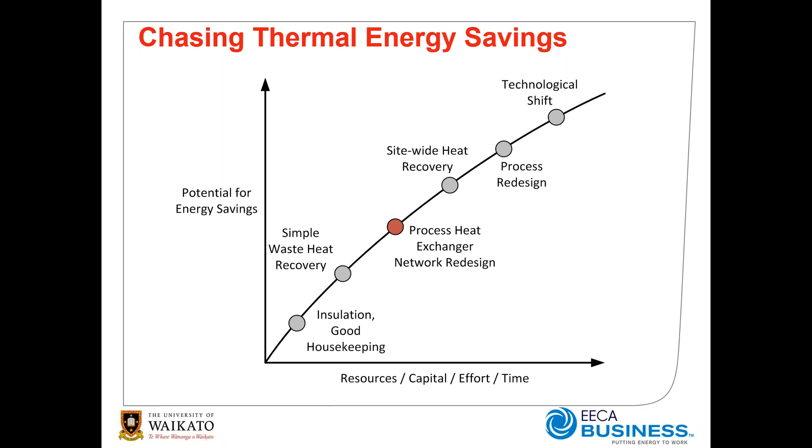As you go up the potential curve there, you get into more retrofit projects, and then you start looking at the site, and right at the top you've got technological shift. So that's really talking about a new process or a different process in order to make the same product, which has potential for a large amount of savings. However, the time and capital becomes quite a lot more. And we'll see when we talk about benchmarks, and in particular a gap analysis, how that becomes appropriate to look at as a measure of how much potential you could get.

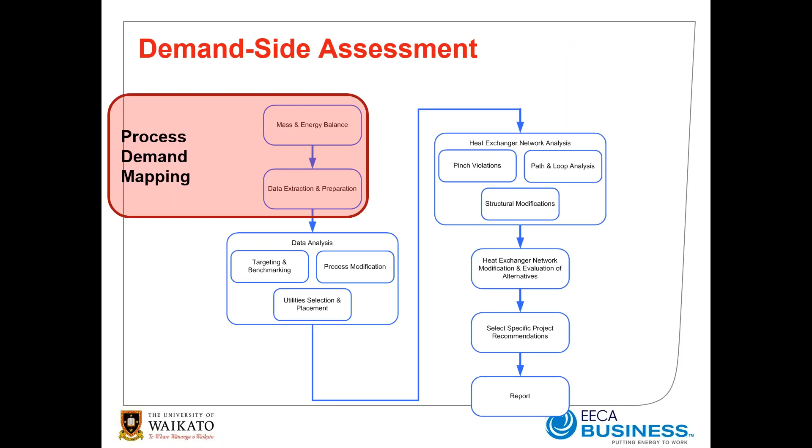Okay, so this is briefly a review from a webinar I did earlier in the year. We were looking at demand side assessments, in particular if you were doing, say, a pinch analysis or looking at your heat exchanger network. And the first thing to do is really look at what is your demand, looking at your process, mass and energy balances, things like that. The second step, or the second group of steps, is around benchmarking and targeting.

And that's a really important step before you do any design, because it outlines some boundaries of what's actually achievable. And so really benchmarking and then targeting is an early stage if you're doing a big energy reduction project, because it helps define what's actually achievable. So it's actually a really important step. Sometimes we rush off and want to do design, but there's an important step before that in defining that.

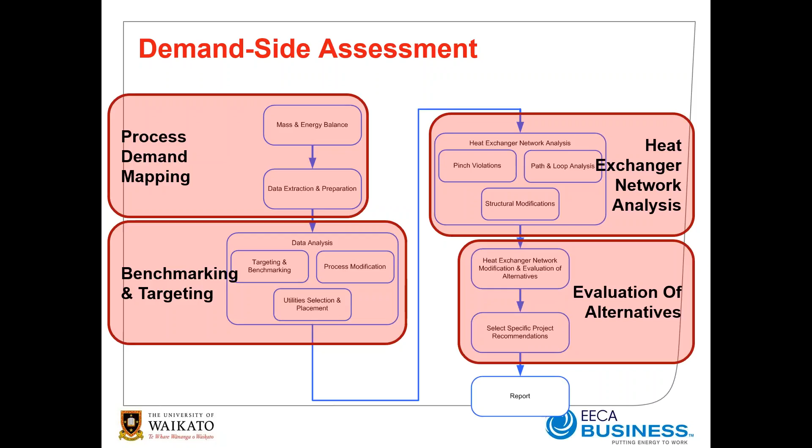Then after you've done your targeting, you go away and do some further analysis and design, evaluate alternatives. But if you don't get your benchmarking and your targeting stage right, or you don't do that well, then you may miss some opportunities for improvement, and they can really aid in identifying opportunities. So hopefully as we go through, we'll see how this benchmarking can be useful. So we'll briefly talk about targets and what the difference is between a target and a benchmark.

So a target is really something you aim for, okay, or you shoot at. So if you're an archer, you have a target that you're aiming to hit, and so it's sort of a goal, I guess is another term that you could use.

Whereas a benchmark is actually a standard that you use to compare something to. Okay, so in surveying, you have a benchmark, a fixed location that you know the elevation, and then from that you can survey out from there, because you know that location is fixed and you know the details around that. I think originally benchmarks were used by cobblers when they made shoes, and you'd put your foot on the bench and they would make a little mark and know what size you were.

And so it's slightly different than a target. What you're doing is comparing yourself with some other measure, and that could be for a number of things. It could be your feet, your energy use, or your costs, or whatever it may be. So it's important to realize the difference. A target is something that we've decided to aim for, whereas a benchmark we're simply comparing with someone else. And we may then decide that we want to reach that standard, or a portion of that standard, or go beyond that standard, but they are slightly different, a target and a benchmark.

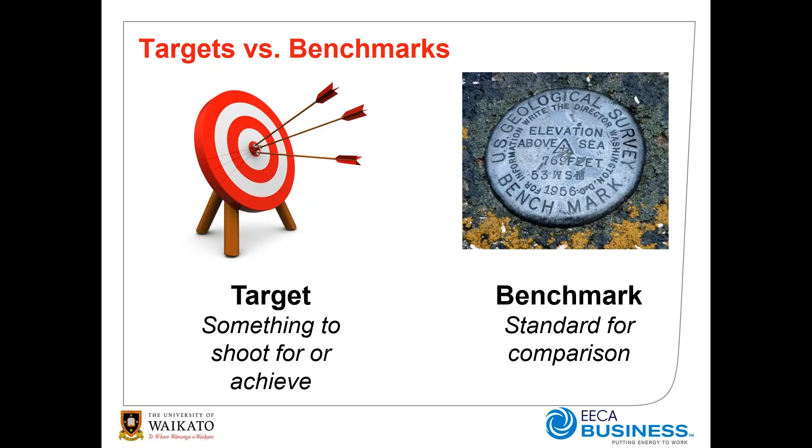So some examples of energy targets that you see often is somebody will come up with, we want to reduce our thermal energy use by 10%, or it may be in cost terms, we want to reduce energy costs by 10%, and that number will come from somewhere.

Yesterday, the draft NZEECS, the New Zealand Energy Efficiency and Conservation Strategy, was released for consultation, and one of the targets or goals it talks about in there is a 1% per year reduction in energy intensity. Okay, so that's a target or a goal that is being mooted as a goal for industry to meet. That's sort of what we've been tracking historically for the last 15 to 20 years anyway, but that's a type of target, something that you're trying to achieve.

Now, targets are important, but you have to keep in mind, how are the targets set? Did the CEO simply come up with a number? They're usually nice round numbers, 10, 20%. They're not 11.5 or things like that. So how are the targets set? Are they based on any analysis or any engineering judgment, or are they simply something to feel good, we're going to try and get to a certain amount?

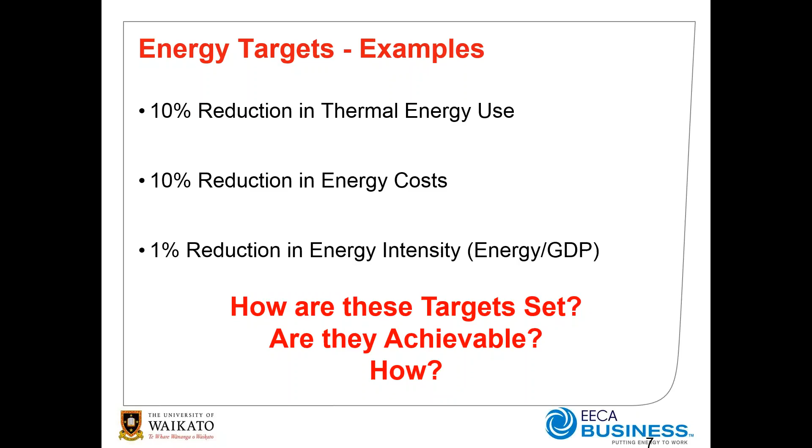And how are you actually going to achieve them? What's the roadmap in order to achieve these targets? And often we set targets and we don't think about these things beforehand. And so one of the things that we've tried to stress in our previous webinars, especially around process heat and the use of pinch analysis and heat recovery, is it actually gives you a rigorous target based on thermodynamics that you can then meet. And you may only go part of the way, but this is a reminder.

So this is what we call our hot and cold composite curves, and when we do pinch analysis, we look at what our heating demands and our cooling demands are in our process. We can then rigorously determine how much heat recovery we can have based on a minimum temperature of heat exchange, and from that we can work out the maximum amount of heat recovery we can have, plus our hot and cold utility targets. Okay, so these are examples of rigorous targets based on analysis that we can then meet.

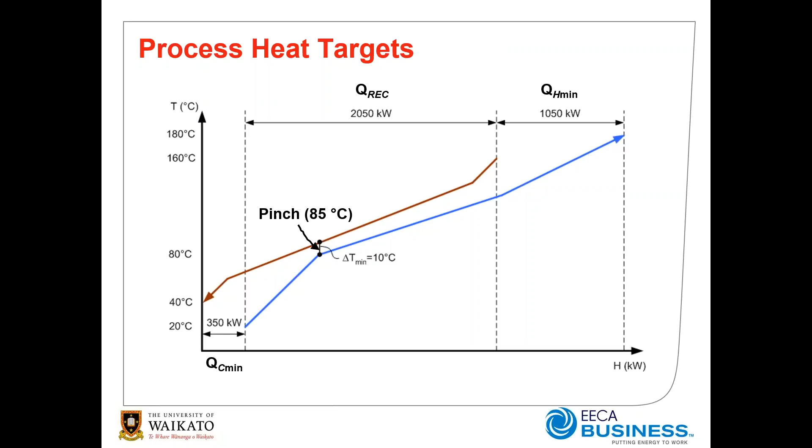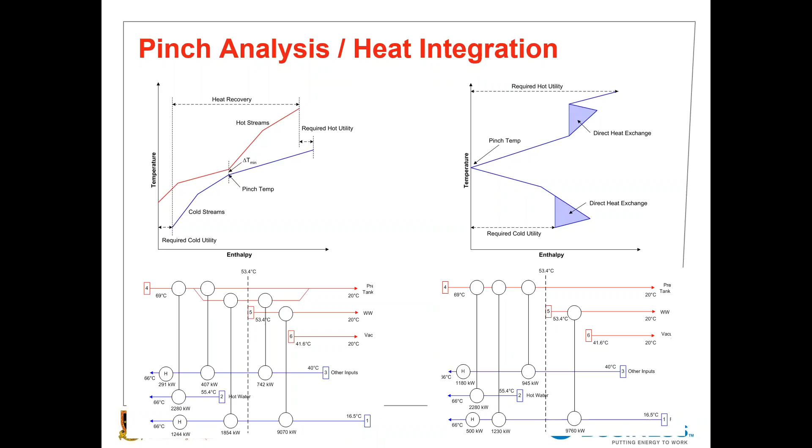It may not be economic to go the whole way, but nonetheless they're based on something and we can show how they can be achieved. And so you move on and look at your heat exchanger network and how you may retrofit that or design it from scratch in order to meet that target and then relax it for economics. So we've talked quite a bit about targets in the past, but it's important that, yes, we get these aspirational stretch targets, but as engineers, we need to figure out how we're going to do that, what's actually achievable within the constraints that we have.

So benchmarking is another tool that's often used in order to look at somebody else or some other measure and determine and identify what some opportunities are and what the potential is for savings within some constraints, depending on the benchmark that you select. So why would you bother doing this?

Well, first of all, it's a really good way to help drive business improvement, both in the short term and in the long term. So, for example, in the short term, if you benchmark your current performance, say, against past performance, then you can look at things like housekeeping, efficiency improvements, how the operational parameters that we're working with affect our energy use, and we can compare that to some other previous time or the competitor down the road. So that can help drive some short-term strategies in order to improve energy efficiency.

They also become really important for long-term strategic planning. And so if, for example, you're looking at a major plant upgrade, then while you're doing that, you can also compare, well, what's the state of the art, or what's a similar plant that we know is an efficient plant. It may be a competitor, it may be another plant within the company somewhere else, either locally or overseas, and then you can look at, well, what's achievable and how do we achieve that? Maybe we need to look at changing some technology or changing the process slightly in order to achieve that energy reduction.

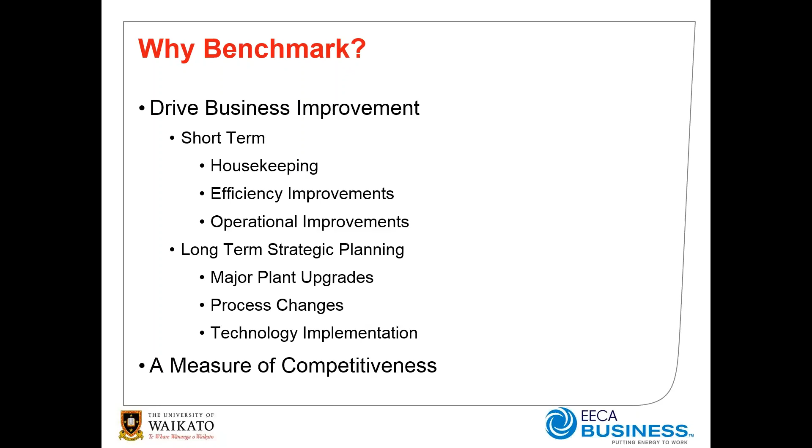And that's often a very useful guide, especially if you're in an international market, to see how you stack up against other countries and other competitors there. And if you're down the far end of the cost curve, if you're very inefficient, then you've got to think about how do I shift along to become a lower cost producer, for example, or how do I improve my energy efficiency in order to improve my competitiveness.

The other thing it may be used for is as a basis for rating or some certification. Okay, so in the forestry industry, if you want to have your FSC, that this wood product comes from a sustainable forest, there are certain benchmarks you have to meet around where you source your wood and how that is managed.

In the commercial building space, just recently in New Zealand there's been this NABERS program, which is about office energy performance, and we're going to talk a little bit about that. EECA has some very good resources there. They're sort of championing that program. But there's others such as Green Star, which is a sustainability rating for commercial buildings. And what they do is they rate you against some predetermined benchmark around what a sustainable building would be, what an energy efficient building would be, and then they will rate you based on that performance or that benchmark.

Okay, so this is just a generic process of what you would do to go through a benchmarking exercise. It's really important to define what you are trying to achieve in the study. Is it energy reduction? Is it cost reduction? Or some other measure?

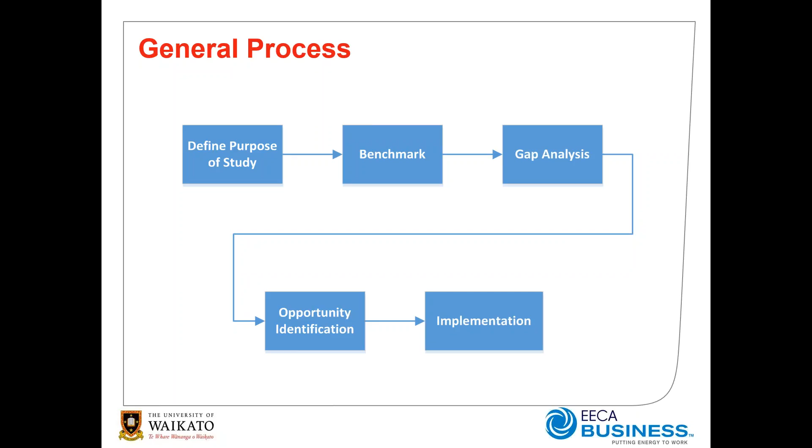Okay, so as we talked about before, a benchmark is really quantifying and comparing some performance metric to some other predetermined standard. And so it could be energy, as we're going to focus on today, but it could be other things. It could be your production cost. How does that compare with others? Sometimes people actually publish these and they're quite insightful. I've seen some from the pulp and paper industry looking at different regions in the world, and you can see the breakdown of their costs, energy, feedstock, labor, those sorts of things, and they do vary. So that's quite insightful as to what's going on, especially if you know where you sit within that comparison.

So energy, water is another one that's often looked at, what is your water use compared to other countries. Certainly in Australia, that's a really important metric that often gets looked at. Carbon is becoming increasingly important. How do you compare with your carbon emissions per unit of product compared to your competitors? So this sort of carbon footprinting, those sorts of things.

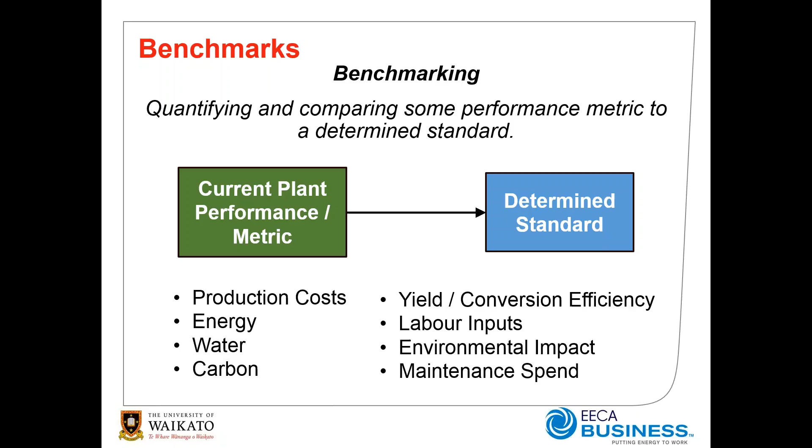Yield or conversion efficiency, certainly in the sawmilling industry, that's an important measure: what is your yield or conversion efficiency of your plant. It could be labor inputs you're benchmarking, what is your wider environmental impact, and then maintenance, what is your maintenance spend, and there's a number of different metrics there that you can look at. So depending on the purpose of your study, obviously that has to be quite tightly defined. Are you looking at an energy benchmarking process, or are you trying to look at something else?

Okay, so if we just focus on energy for a moment, what are some of these benchmarks that you might decide to benchmark against? And as we mentioned before, but it's important to reiterate, it's important to pick the right benchmark for what you're trying to do. So for example, you might decide to compare your current plant performance with your past plant performance. And if you've done some projects, then that may have improved.

Often a common one is an industrial average. Every now and again, different sectors will employ someone to go through a benchmarking study, and people can voluntarily opt in, and you can compare yourself with an industrial average based upon a sample size. And that can be nationally or internationally depending on the industry. So that's a common one. Often in the literature you can find indicative industrial averages of energy performance, so energy per unit of product.

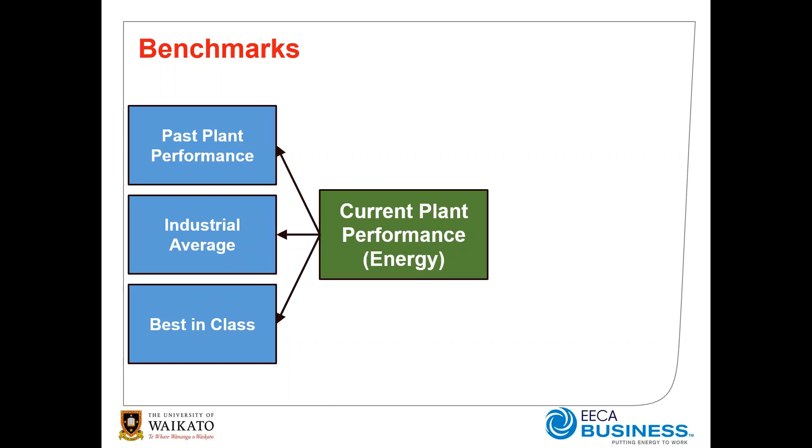The third one that's often used is a best in class. Obviously different plants use different technologies in order to make their product, and so sometimes it's not a fair comparison to compare an older plant with a brand new plant with the latest technology, although that's an important measure in itself, but you're really trying to compare like for like. We'll talk about that in a little bit more detail soon.

Another benchmark is a best practice or best practice technology, and so that really is around, if we have best practice operation based on our current technology, what could we achieve? If we're implementing best practice maintenance, if we've optimized our process from the parameters, temperatures and pressures and flows and things like that, what does that benchmark look like?

Another one is, what's the best design or the best available technology? And that becomes quite a useful one, because that's sort of what's doable based on available technology. And so especially when you're looking at a major plant upgrade, then comparing it to that is a useful measure.

And then also you could come up with an energy target or a theoretical minimum. So for example, the pinch targets for heat recovery, they are an energy target based upon some thermodynamic analysis, which you can then compare your current performance against. We call them energy targets, but it's really an amount that you could get to, an achievable energy use. And so that can then define what your gap is between your current use and what's achievable.

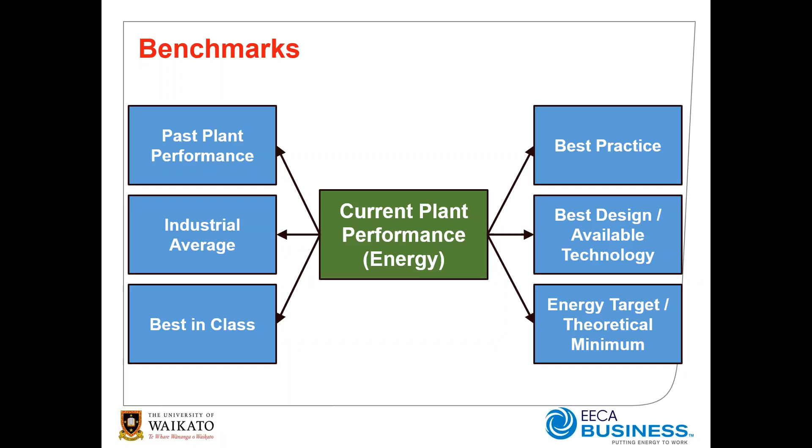That best in class is your class, not the other class. And so that's important to define when you're using that as your benchmark. And that really leads on to a bigger question: what are you actually comparing? Are you comparing apples and oranges? Your 50-year-old plant with a brand new plant that uses a lot different technology, a lot different process.

Certainly in some industries there's been some large changes in technology in the last few years, and so that's not really a fair comparison because you're not really going to just scrap your plant and build a new one. So are you comparing apples with oranges or apples with apples?

And then even when you are comparing apples with apples, it's important to remember that we have different types of apples. James yesterday mentioned that he thought there was something like 7,500 species or types of apples, and so comparing them, they look the same, there are some similar attributes, but are we comparing the right apples with the right apples? And then just to take it one step further, if we've got an older apple, it's not really a fair comparison to compare it with a new apple.

And so this is this best in class. Defining what your class or what quartile you're in becomes quite important in order to give a fair comparison, if that's the benchmark that you have determined is the most appropriate. Sometimes it's insightful to compare it with what a new plant would be to give you an idea of what's potentially possible, but we just have to step back and really make sure that the benchmark that we choose, and that may be more than one, is the most appropriate to what we're trying to achieve.

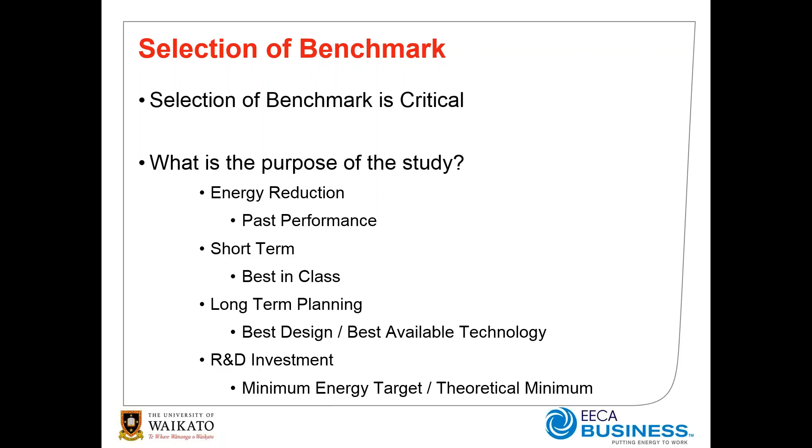Okay, so if we get into the nuts and bolts a little bit of the different types of benchmarks, obviously to compare with something else, you need to know what your current performance is yourself. So you need to do some quantification and some analysis of what you currently have. On one level this may seem straightforward, but it can get very tricky or complicated very quickly if you're not careful. So if we have our simple plant here, for example, we take a feedstock and we make a product, and that will go through a number of processing steps. Obviously we take in energy, and then we have some emissions.

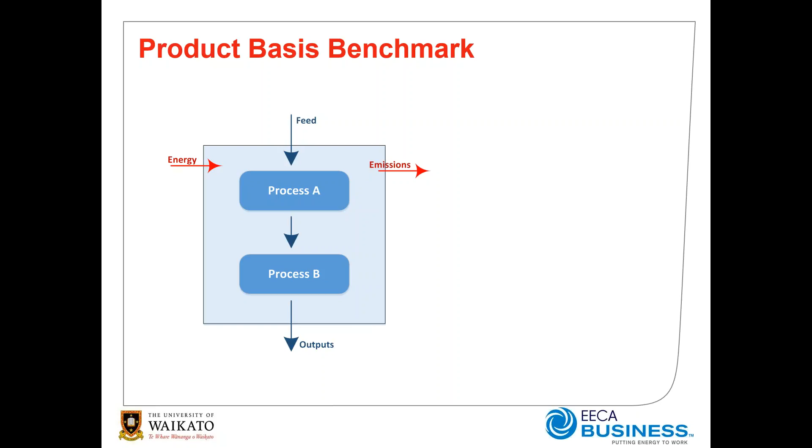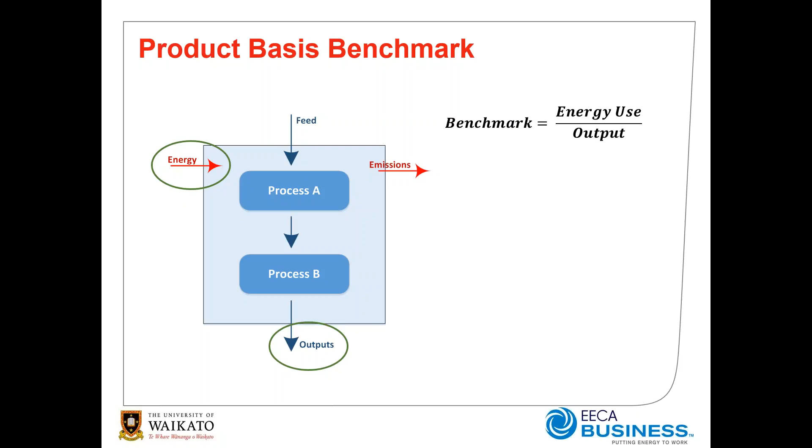So if we're only focused on an energy aspect, then one very simple way is we look at our energy use, and then we divide that by the total output of our plant. That will give you your benchmark or a specific energy consumption, so that may be gigajoules per ton of product. If you just look at a very high level, that's often quite easy and quite quick to determine. However, there are a number of things you just have to be careful of.

One of the advantages of it is it does account for all the aspects of your facility. So all the inefficiencies, including your utility system or even your admin building, if you just take your total energy bill, it will capture the inefficiencies there as well. People leaving the lights on and all this sort of thing. So that's an advantage, although sometimes you want to remove and discount those. Because if you include those and the benchmark you're comparing to doesn't, then it's not really a fair comparison because you've added things which are not in the benchmark.

It is pretty simple, and if you're producing a single product, then it is fairly straightforward. Where it becomes more difficult is if you have multiple products, especially byproducts. So what you then have to do is look at whether there is a standard to assign a certain proportion of that energy or the emissions to different products or byproducts. There may be standards in the way that's done, or you may have to look at the best way to do that, keeping in mind that we want fair comparisons when we compare to a benchmark that we've selected.

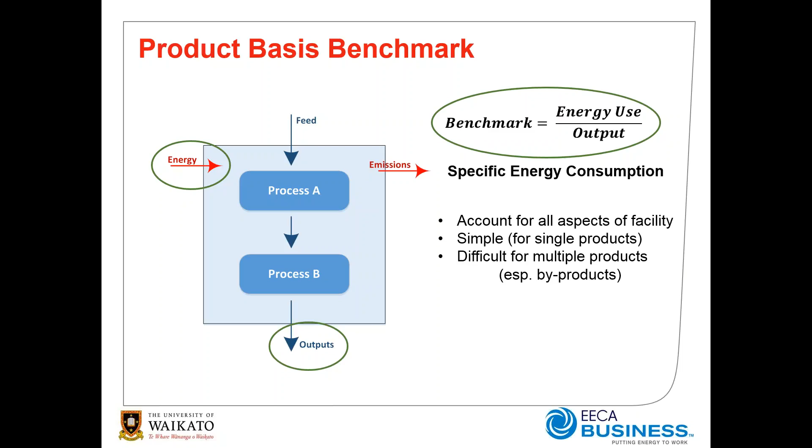So this product basis is useful and common, but it may not capture all of the things that we want to capture, and when we do our gap analysis and try to determine why there is a gap between our use and a benchmark, we end up having to look a little bit at the next level down. So the other type of benchmark that is commonly used is referred to as an index benchmark. What this does is it looks at each individual process and comes up with some index of efficiency, or it may be the specific energy consumption of that process based on its performance.

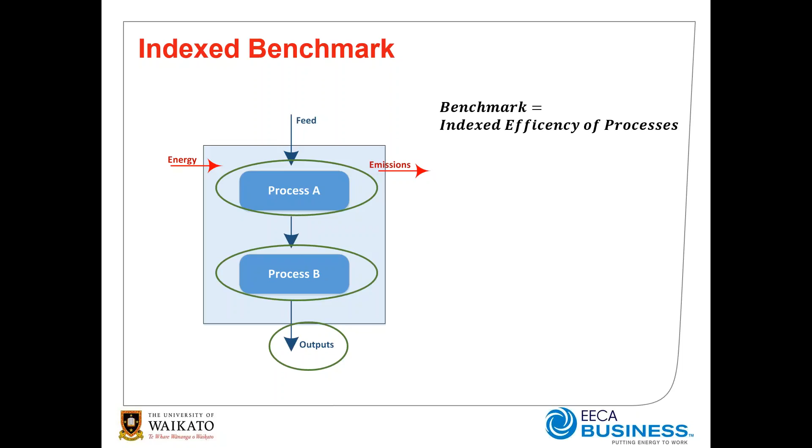Now, what that does is it forces you to look at each individual process or step in your plant, and once again there's some advantages and disadvantages. It's a little bit more time consuming. You have to use a lot more judgment in order to do this, but one of the useful things is you can compare some processes between different applications.

So for example, if you're just benchmarking, say, your heat plant or your boiler, then you can compare that with the guy down the road. He may be making a completely different product, but if you look at your boiler efficiency or condensate return, all those things can come into that benchmark or that comparison. So that becomes useful if you want to compare similar processes or technology between different products.

The other important advantage is it can help identify specific areas of improvement. For example, you may have 5 different processes and 3 of them may be performing at an acceptable benchmark level or an acceptable performance level, but 2 may not be. And so obviously that's where your greatest inefficiency lies, and so that identifies areas for you to look at first.

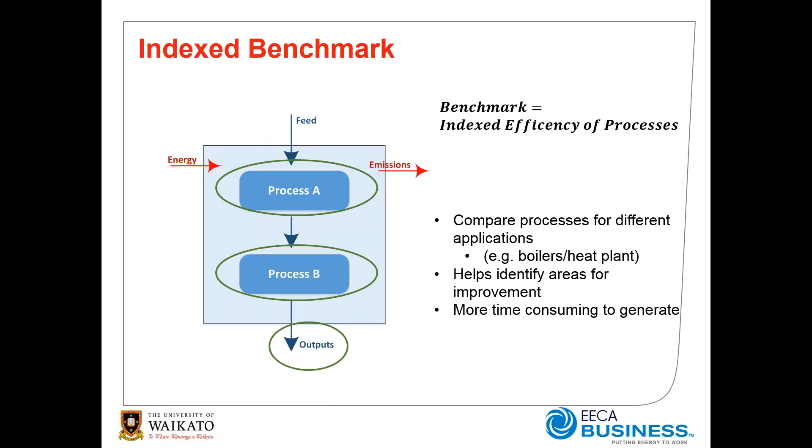However, one of the big downsides is it does take a little bit more time to generate. Often you have to do some measurements at that process level because you're not sure. And so it's really important to get the system boundary defined, and what are you trying to benchmark? Are you just trying to look at a single unit operation? Certainly in many sectors, you may have evaporators, for example, and they're often an intensive energy user, and so you may just decide you're going to benchmark your evaporators, and you may benchmark them with other plants or other technology or whatever.

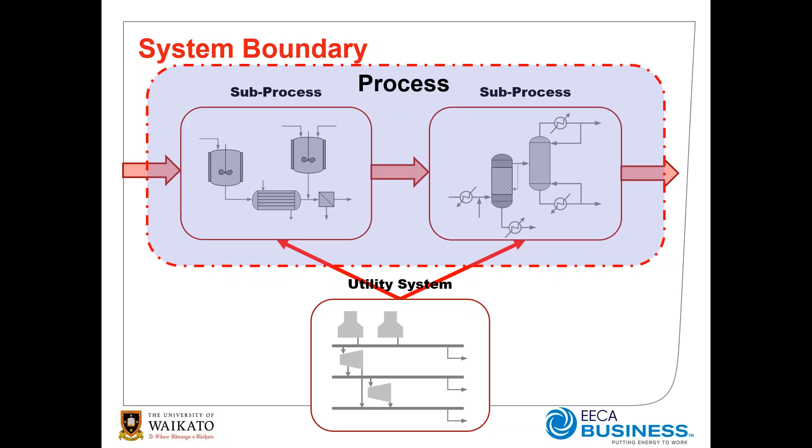Are you looking at the sub-process, a collection of processes that do a predetermined job? Are you trying to benchmark that? That might be evaporators, or it might be distillation, or whatever it may be. Or you may decide that your system that you need to look at is actually the entire process, and so you have to make a judgment call as to, is the utility system included in that or not? And depending on the benchmark you're using, there may be some guidance there as to what's included and what's not.

Or you may decide that the entire plant is the most appropriate boundary. So some thought has to go in at the planning stage, really around what your system boundary is in order to capture the right information when you're determining what your current performance is and what the benchmark is.

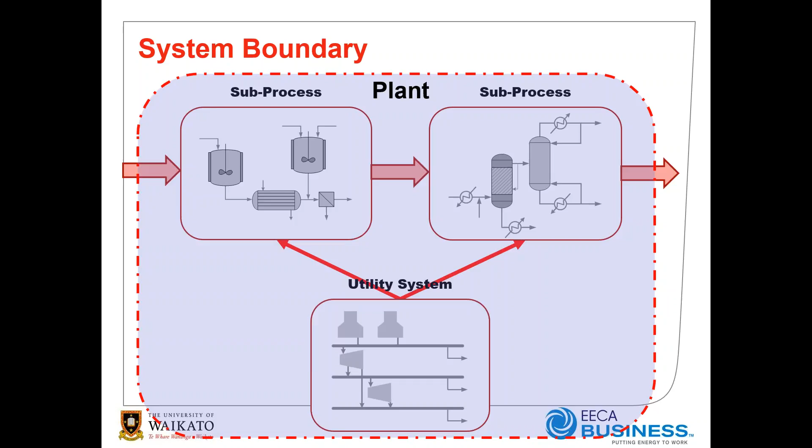Now, if we just talk about commercial buildings, for example the NABERS program or rating, they have a number of different ratings which are based on, I guess, a system boundary. For example, they have what they call a tenant rating, which is just a rating for the tenants, and it only includes things like the lighting that the tenant is using, both signage and inside, the power points that the tenant has in their space, the tenant server room, any air conditioning and things like that associated with that.

Whereas the second system boundary is what they call a base building rating, and that includes the whole building, HVAC, lifts and elevators, common spaces and things like that. So that's a separate boundary that is determined and I believe quite well specified within the documentation for NABERS. You can also have a whole of building rating. So sometimes if you're using a standardized benchmark, then there may be some guidance as to what the boundary is, what is included and what is not included, and how to treat things.

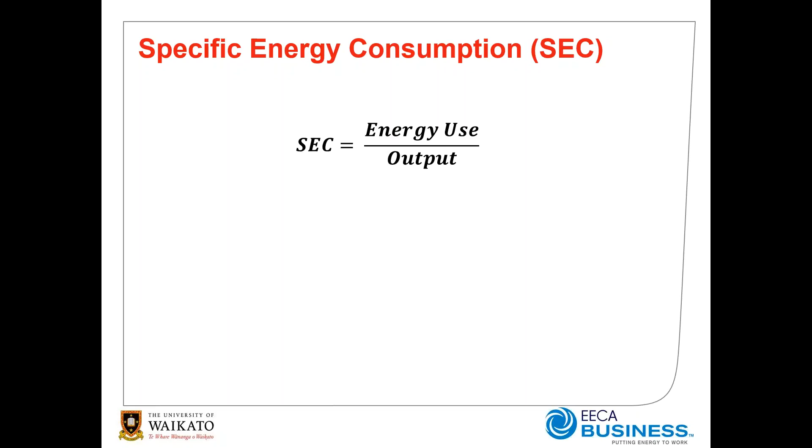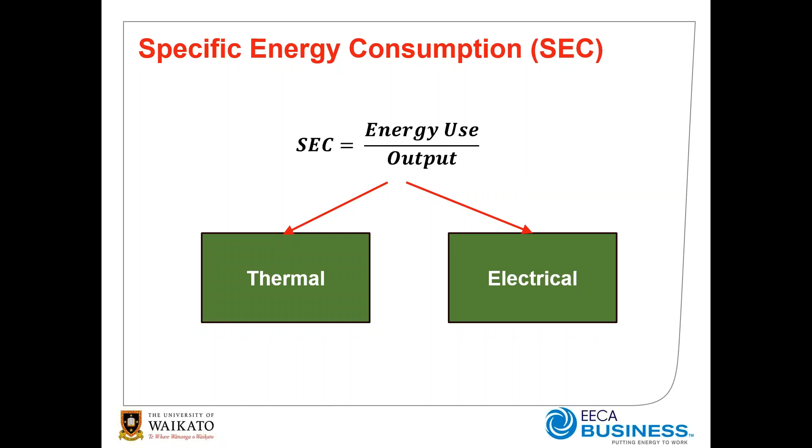So one of the important things to determine, and this is really your comparison, is what we call the specific energy consumption. It's a pretty straightforward concept. It's your total energy use per unit of output, so gigajoules per ton or whatever. But it's important to then split that out into thermal and electrical use, because they often have different uses. So you may have a specific energy consumption for your thermal and then for your electrical.

So what you can find in the literature often is different indicative specific energy values for different products. So here's some for pulp and paper. For example, if we just look at kraft, softwood, bleached and dried, then you've got indicative steam demands and electricity demands per air-dried ton of product. And then we've got different types of paper, newsprint, and you can see the steam demand and electrical demand there.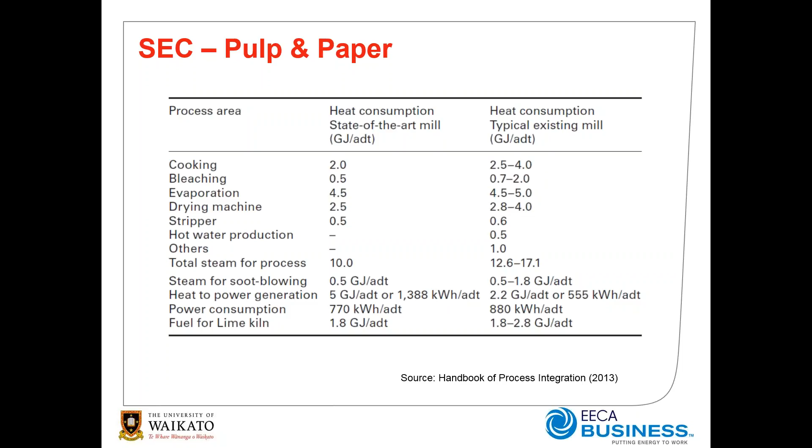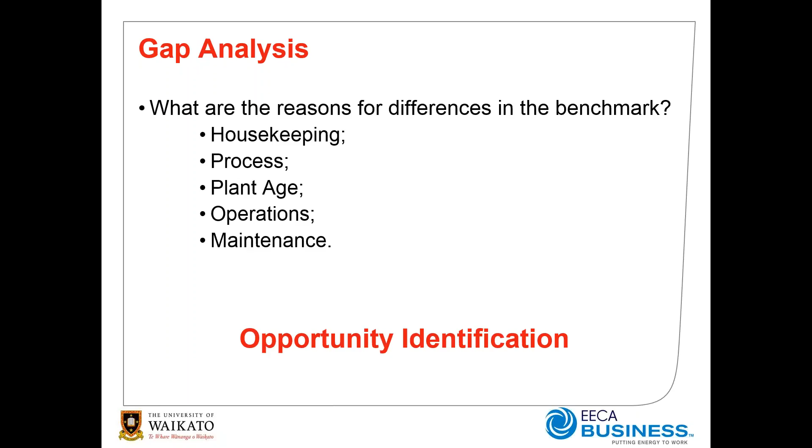And then what that then leads to is, once you've compared yourself with this benchmark, is you go ahead and determine why is that different. And is it your housekeeping? Is it the process that you have? Is it the age of your plant? Things like that. But the reason for doing that gap analysis is really then to lead on to opportunity identification. How can we close that gap? What do we have to do in order to do that?

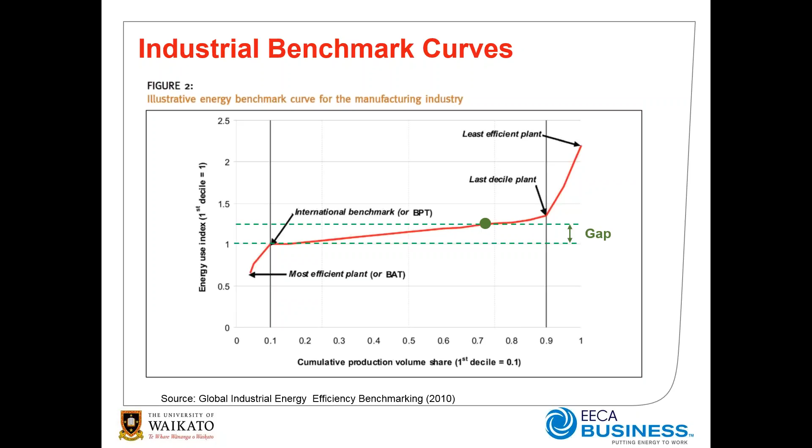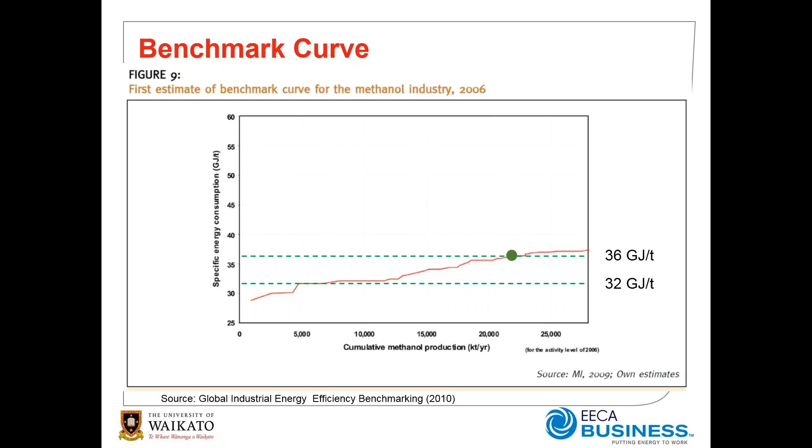And so what you would do, if we go back to our generic curve, is you find out where you are on that curve, decide on which benchmark you're going to compare. In this case, if I just use the international or best practice technology benchmark, then obviously there's a gap. So let's say, for example, that was my plant on my methanol benchmark curve, and I decided to take my benchmark as the international one at 32 gigajoules, and let's say I've determined I'm at 36, then obviously there's a 4 gigajoule per ton difference between what I'm currently operating at and what the benchmark is.

And so the question really arises, why is that different? And then you can go looking for why that is different. Now you already may know that, but what are the economics, what projects do I have to implement in order to achieve or reduce that gap?

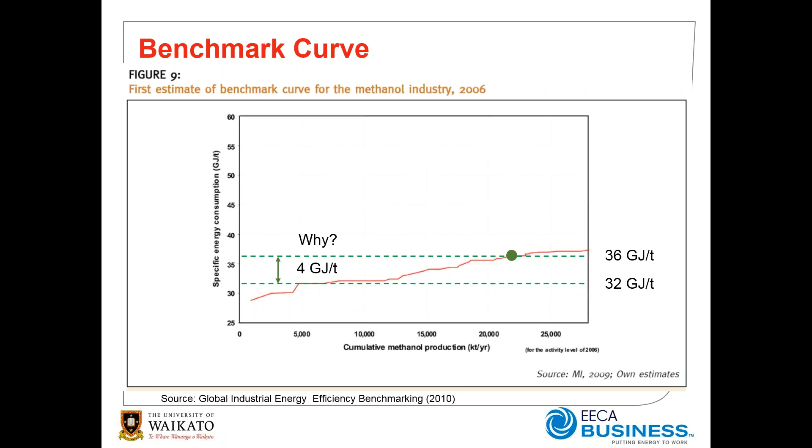Okay, so I've got a couple of brief examples here as to how this could be used. So as I said before, this NABERS rating, the rating is pretty straightforward. You get a number of stars depending on how good your performance is of your building, and there's a lot of standard measures and how they come up with this. So for example, if you get 4 stars, then you have excellent performance. It attempts to take into account things such as location. Obviously an office block down in the cold south will be different than up in the warm north here. So it takes into account those sort of variabilities and determines a star rating.

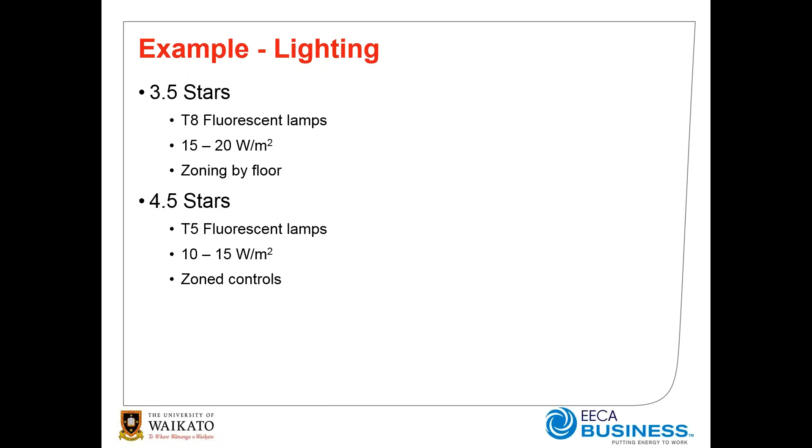But to give you an example of the specifics, it sort of benchmarks different things like HVAC and lighting and things. So this is, I guess, what a 3.5 star NABERS building would look like from a lighting point of view. Okay, so they would be using typically between 15 to 20 watts per meter squared, and they would have zoning simply by floor. As you move into a 4.5 star building, then the fluorescent lamps that you use become slightly more efficient, and your energy use drops to the region of sort of 10 to 15, and you may have control on your individual zones.

A 5.5 star rated building would have T5 fluorescent lamps and LED lamps, and the energy use would be down at sort of 5 to 10 watts per meter squared, but there would also be things like presence detection and daylight control.

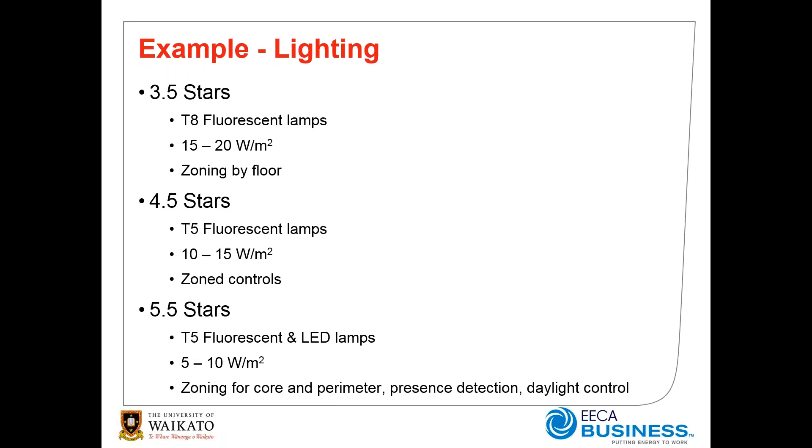So in the NABERS rating system, the benchmarks or what you're comparing it to are quite well predetermined, and so that makes things straightforward. I think it's quite detailed and involved. However, you can get a very good comparison because the benchmarks are very well predetermined.

Okay, now the second example before we finish is from the refining industry, and they have used benchmarks extensively for a number of years. It's quite an energy intensive industry. On average, about 6 to 7% of the incoming crude is actually used for energy. So you're actually using your feedstock, and as you know, oil prices go up and down, and so if you can reduce that, often your competitiveness is very closely connected to how efficient your refinery is.

So in particular, there's what they call the Solomon's Energy Intensity Index, and they're a fairly large consulting company, and they are well known for these energy benchmarks, and not just for refining but in other industries as well. And when you look at how they do this, they use a statistical model to look at your refinery and compare that with other plants of the same kind and things like that. And I've got an example of what they call a Solomon's curve in a minute.

And then the example I'll focus in a little bit more is there's a company called KBC, and they have their own method of doing benchmarks in the refining industry based on a best technology index, which is slightly different than the Solomon's energy intensity. They take a slightly different approach to that based on simulation of the best design of that plant given what's already there.

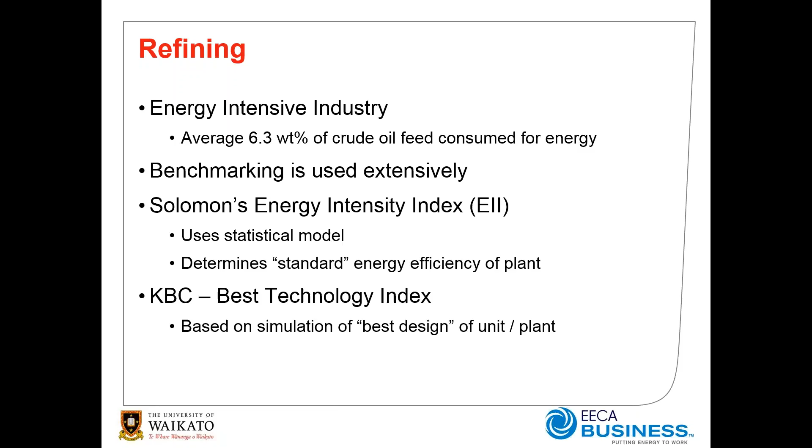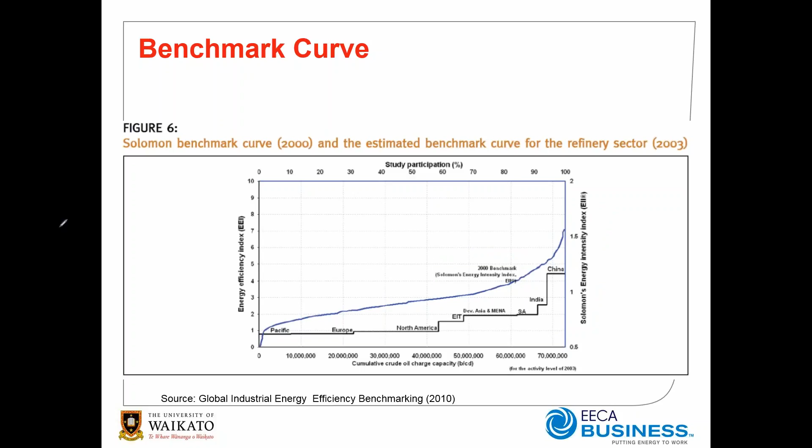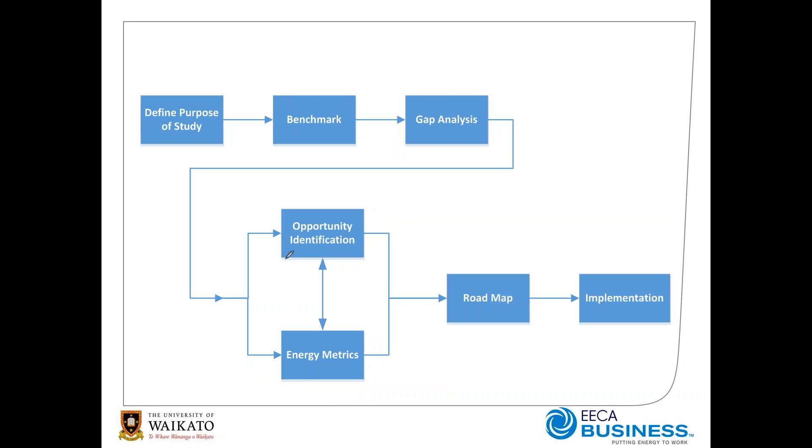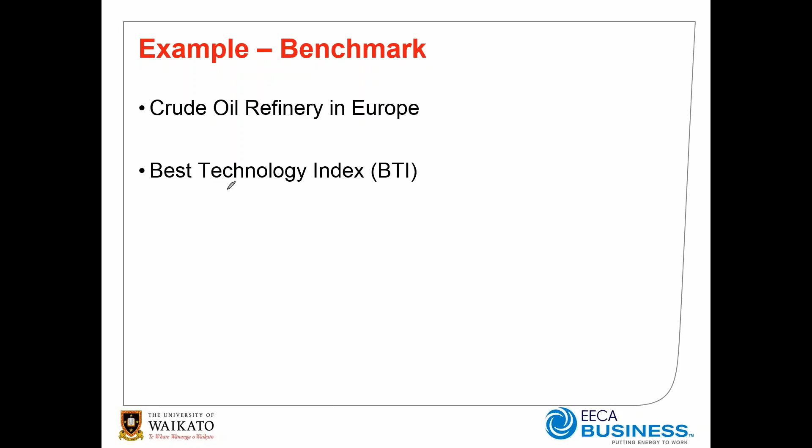So this is an example from a refinery in Europe. Okay, obviously it has to be confidential, so you don't know which one. There's lots of refineries in Europe, so take your pick. And they use this best technology index. That's the measure they use, and what that is, if you're at 100%, then that's your best technology. That's where you want to get to, is 100%.

So for this particular site, they went in and did the analysis, and the best technology index was 149%. So what that means is that the plant is using about 50% more energy than its best performance in its current state. Okay, so without having new technology or anything like that. Based on what's there, it could potentially reduce that by almost 50%.

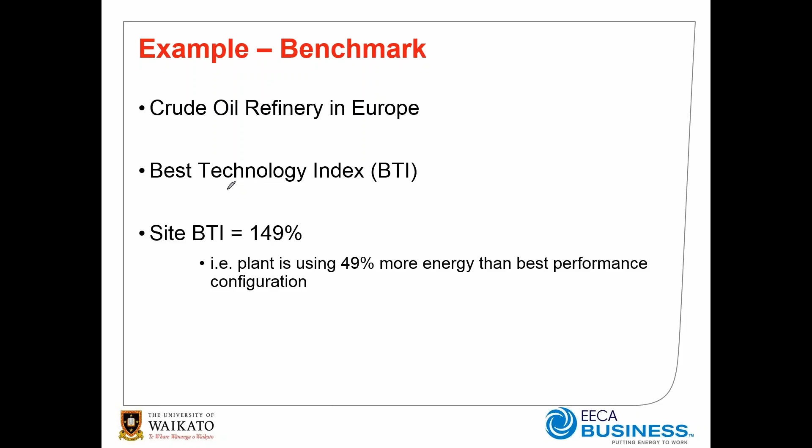And how they do their gap analysis is in the refinery, there are only a few areas where you need to look. So one is fired heaters. So this preheats the crude before distillation. What is the performance of the fired heaters? How is the power generation on site? What does that look like? How much heat integration is there? One of the major things in crude oil refining is preheating the oil using heat recovery. There's often huge potential for improvement there. So heat integration, and then what does the utility system look like?

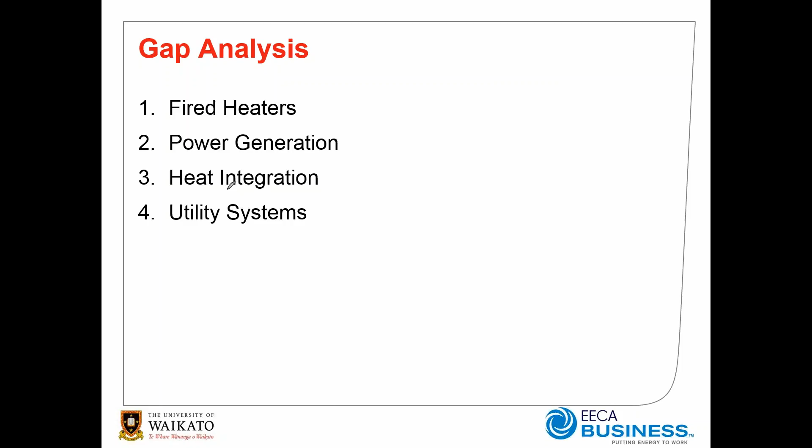So what they do is they apportion or assign and determine how much of that gap is across those four areas. Okay, so for this particular refinery, only 3% of the gap was determined to be from the fired heaters. So what that tells us is they're performing very well, and you can see that the power generation was just above 20%, and then about a third each was from heat integration and the utility system. So 85% of the gap of that 49% was attributed to those four areas, and 15% was unaccounted for. That will be things like different operating pressures and things like that.

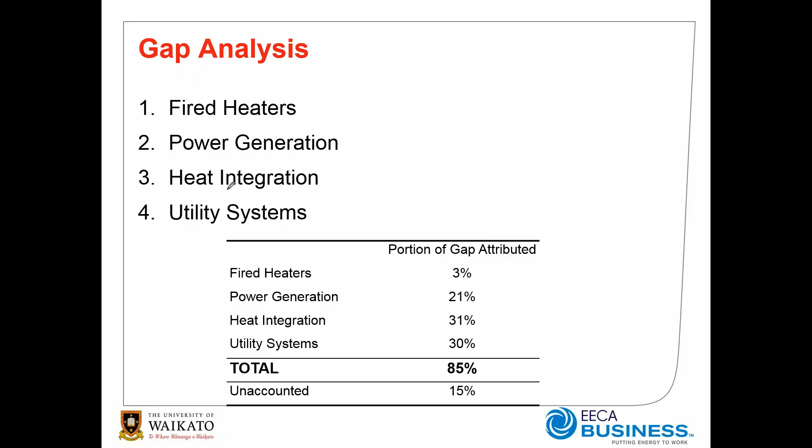Okay, so now this helps you focus in on where to look for opportunities. So obviously you wouldn't spend much time on the fired heaters, and you would look at heat integration, utility systems, and then your power generation as well.

So from that, they then develop what they call a roadmap, which is really what potential opportunities are there. And so some further analysis has to be done. Certainly for improved heat integration, a big pinch analysis would be done. You do utility system modeling to optimize your utility system and things like that. And then once you come up with a number of projects, you would then compare the economics of those against what you need to do in order to get things implemented.

And in this particular case, they determined there were 8 non-investment opportunities. So this might be things like changing some temperatures or operating parameters. 8 investment opportunities, that may be new heat exchangers or whatever that may be. And then some were around utility systems. And so, as you can see, 7% out of the 14, so 7% reduction in energy costs came from non-investment opportunities. And these were identified by going through this benchmarking process and then looking at what the gap is and determining some projects.

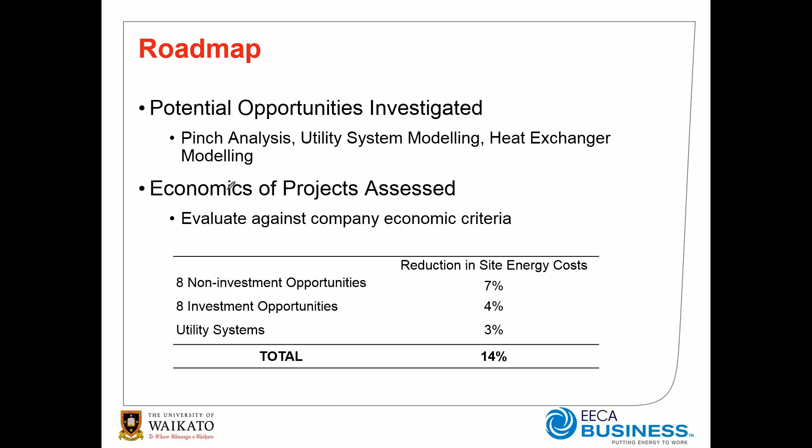Okay, so we're pretty much out of time. We have some time for questions at the end, but benchmarks and targets, they are slightly different, but they are complementary. And by performing a benchmarking exercise, it can help you determine what a reasonable and achievable target is. As we mentioned and stressed earlier on, it's important to select the appropriate benchmark depending on your study and the purpose that you're trying to achieve.

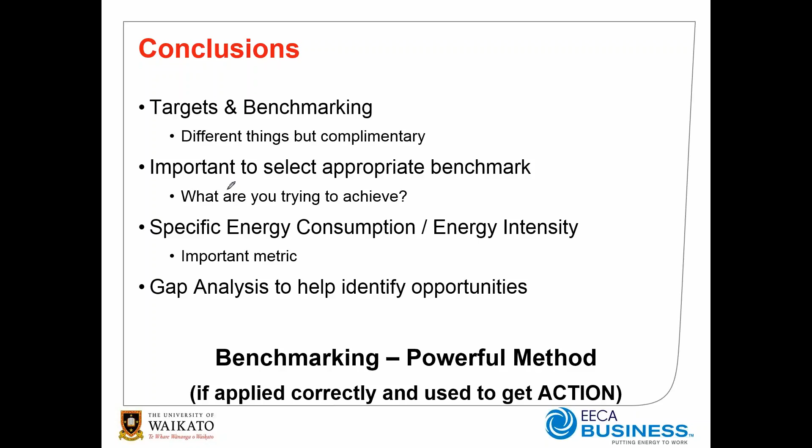Determining your specific energy consumption, if it's an energy reduction study, that is an important metric. And determining that well, both for your thermal and for your electrical, that is an important step. And then that leads on to a gap analysis. It's important to determine and identify why there is a gap between your performance and the benchmark that you've selected, and then to try and identify opportunities to reduce that gap. So I guess to sum up, benchmarking is a powerful method, but it has to be applied correctly, and it's only really useful if it gets you moving into some action and getting some things underway.